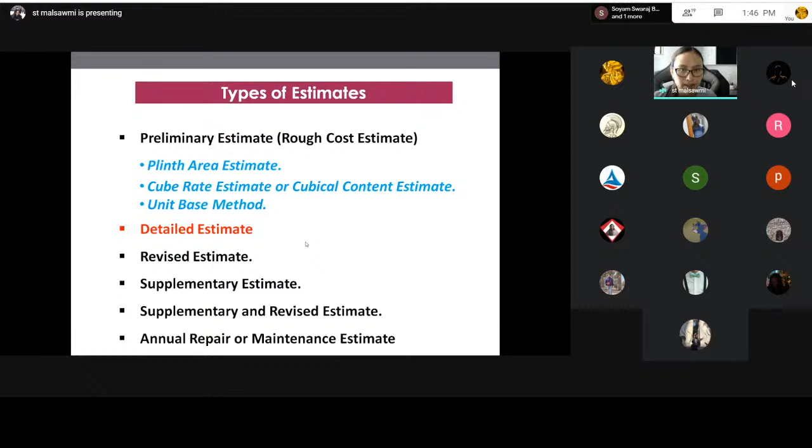All right, so today we will be looking into the detailed estimate, from the different types of estimates. In detailed estimate, you already know what a preliminary estimate is, and a detailed estimate is nothing but, as the name suggests, an accurate estimate. Usually detailed estimate can't be worked out at the beginning of starting your project - plinth area estimate, or preliminary estimates, are used for the estimates worked out at the beginning of your project, as well as at the end to know the approximate cost.

To prepare a detailed estimate, you have to finish all your work first - all your details, all your specifications, all your plans, sections, elevations, and specifications have to be prepared first. After that, you can work out your detailed estimate from that.

In this, to prepare a detailed estimate, you have to take out the length, breadth, and height. Most of it uses the units we have already studied before. There are different modes of measurements - we have per square meters and running meters, and we have cubic meters. Here we are going to take out the quantities of each of the different items.

Also, like I've told you before, we have to start from the bottom - not from the superstructure, but from the foundations. So we will come up from the foundations. We will start with the excavation, then the laying of the PCC and your foundations, then comes the columns, then the floors, then the brick walls. If we're having a first floor, the floor of the first floor, then the brickwork of the first floor. If we're having the second floor, then we'll come to the floor of the second floor, brickworks, and the roof of that, and so on. So it's step by step from the very beginning to the very end.

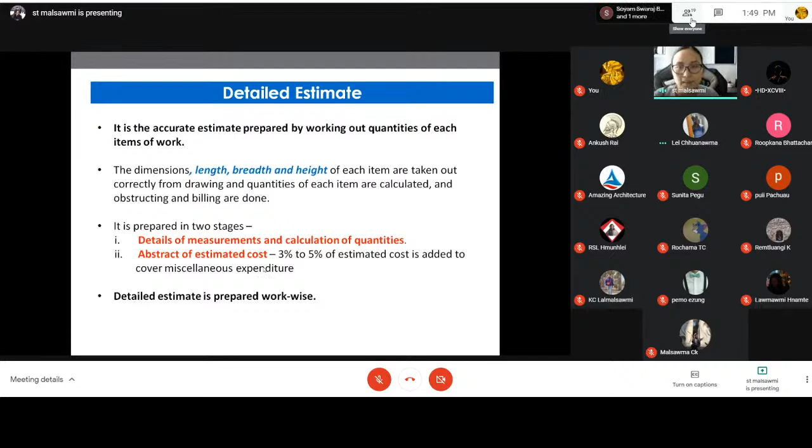It is also prepared for technical sanctions. So if you are working and you need a sanction, usually if you are working as a contractor, or if you are going to build a building, you are going to need a sanction. So to get that sanction, you need to submit your plans for tender calling, and also you need to submit your plans as well as your detailed estimate for sanctioning of the money for the project that you are going to handle.

In the rough estimates, the preliminary estimates, it's just a rough estimate, so there can be many mistakes and many different items or costs which are not calculated in the rough estimate. In the detailed estimate, all that will be eliminated, and this is going to be - you can't say it's the exact detailed estimate, but kind of exact - but you still need to give contingencies, like 5% contingencies for your estimates.

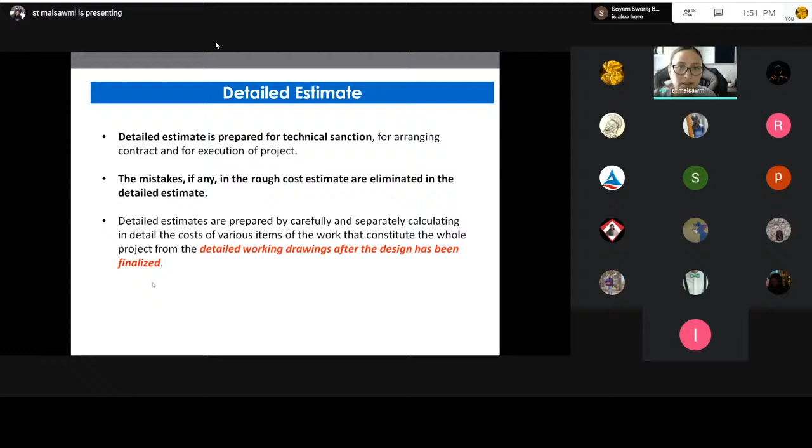So you need to have your detailed working drawings and your specifications first before you actually start your detailed estimate. First, like we've already talked about the two stages - the details of measurement and the calculation of quantities. Like I've already told you, the different works is divided into different heads, such as earthwork, concreting, brickwork, RCC, plastering. That comes under different heads.

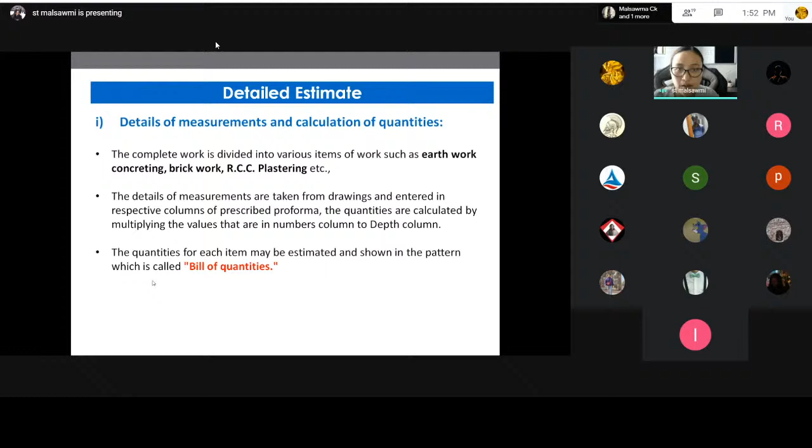It is also divided work-wise, and the details of measurements we will take out from the drawings, and we will learn how to take out the quantities from drawings in this class. It is also called the bill of quantities - I think you might have heard this, BOQ. When we're talking about BOQ, we are talking about the calculation of quantities.

Details of the measurement form, or the bill of quantities, will be somewhat like this: we will have the item number, the description of the item, the number of items, length, breadth, and height of that item, and then the quantity - length into breadth into height. We might also have the units after this column, and then the explanatory notes or remarks, which show how you calculated your length, breadth, and height.

You may write it here in the explanatory notes how you have taken out. And then we have the abstract of estimate cost. After we have worked out all the different things - length, breadth, and height - now in the abstract of estimate cost, we will only take out the final quantity that we work out here. We will take that out and multiply it with the rates so that we can know the rate for the specific items for each and every detailed item of work in your drawings.

Usually a percentage of 5% is given, added for contingencies due to unforeseen items or expenditure. Even though you are doing a detailed estimate, there will still be unforeseen items or expenditures, which may be due to loss because of some failure in your equipment, or unforeseen reasons like a landslide where you need to redo all your work again. All those will be put in the contingencies.

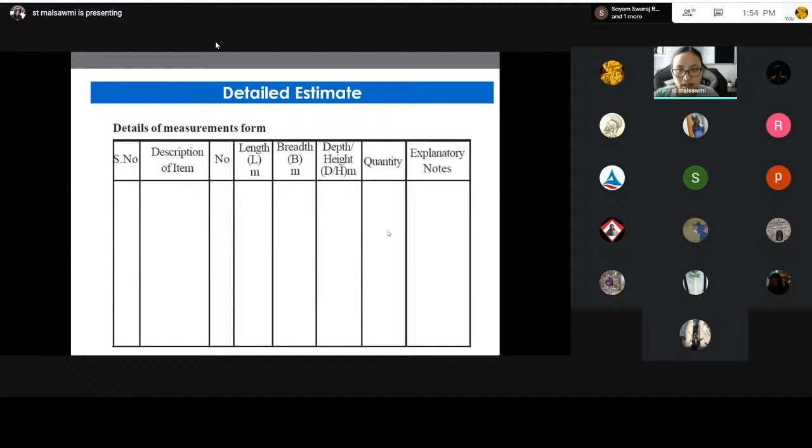After you have calculated the quantity of each item, you will take that total quantity of each item along with its unit - cubic meters - the rate as per the SOR PWD, the rate per unit, and then the total amount. After the total amount, everything will be calculated, and after adding all the amounts of the different particulars, we will get our final estimate cost. From that, we will add 5% contingency and maybe 2 to 3% establishment charges.

All right, do you understand it at least a little bit? Yes, yes, yes ma'am. All right.

So for a detailed estimate, including the detailed estimate that you have worked out, you also need to submit a report, specifications, the abstract of cost, and the price bill of quantities, BOQ. So when we're talking about the BOQ, that is the abstract of cost, the price bill. Usually, when you are calling for a tender, how this tendering and contract system works, you will learn more in detail in your next semester in professional practice one.

But now, basically what you do in a contract is, for a work to be sanctioned - let's take our department building for an example - you are designing the department building first, and it might be that the money is sanctioned by the central government or from the university. So first you need to work out the plans and give the specifications. After you have the working drawings and specifications, you will calculate the detailed estimate.

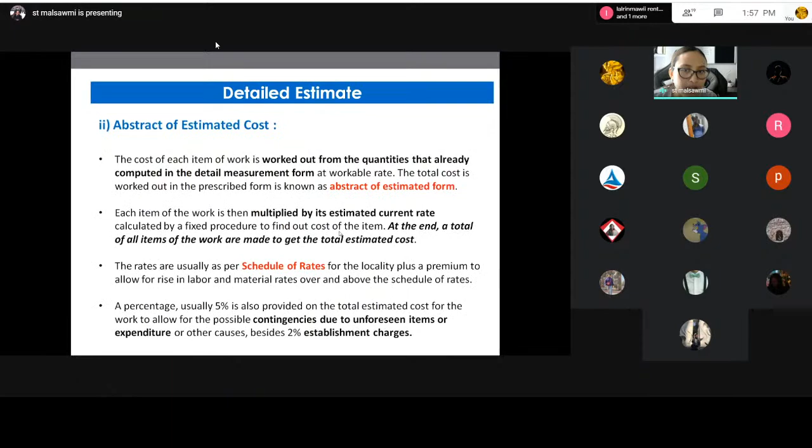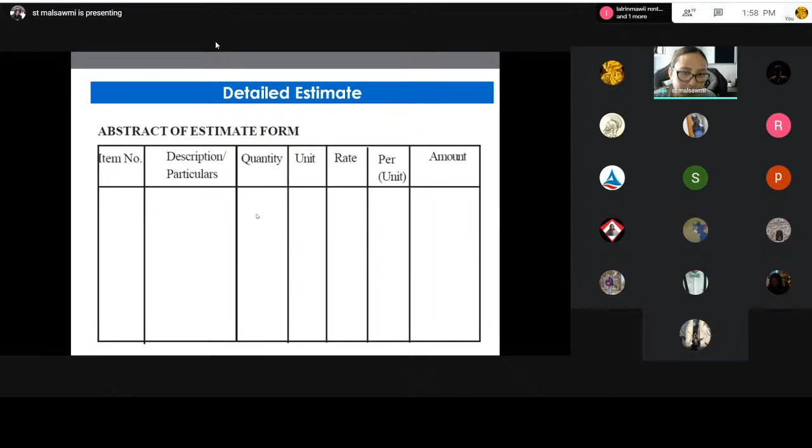So for calling out a tender, you will need to give out the plans, the working drawings, the specifications, and also the bill of quantities, BOQ, or the abstract of estimate form over here. You won't give the detailed calculations of the detailed estimate as you work out here - this is merely for the calculation of the final form. So you will give this out, and from this they will know the amount and quantity, and the rate they will answer for themselves.

So for the sanction of the money, you will need to send in the report as well, the specifications, the abstract of cost, and calculation sheets if needed.

Ma'am, in the report you mentioned explaining history. What does that history mean? Is this for the sanction or for giving out the DPR? Have you heard of DPR, detailed project report? In a detailed project report, this is when there is a...

So suppose, usually what we do here is, for something like a YMA hall or different halls in different localities, we will prepare a detailed project report for that. We will write about the history of the area, the history of the locality, why the locality is needing that particular project like a hall. We will write about the need for it, the history, the necessity, and what all things will be included, and you will also give your drawings and your estimate, and submit it to the funding agency.

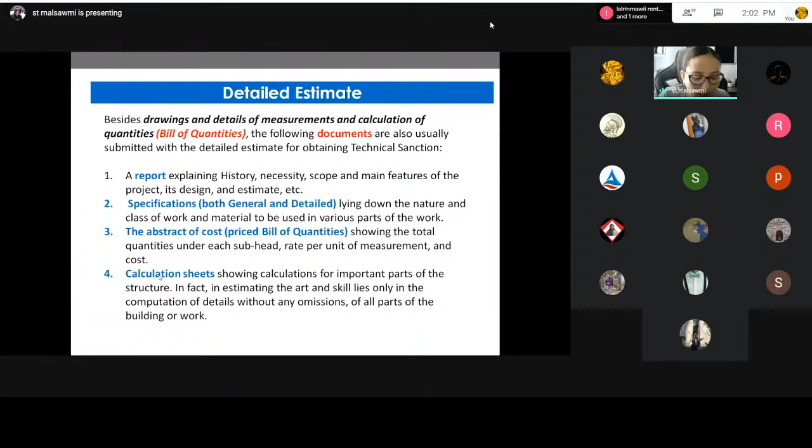Okay, you will understand it more once we start calculating, how the calculations are taken out. So you will learn that. Okay, miss, one question. Yes.

Miss, this type of estimating doesn't include the labor charges, right? Yes. So if a contractor wants to win that tender, and the estimation cost does not include the labor charge, how will he calculate those labor charges? How many laborers would be working and all? Yes, that would all be in the SOR.

Okay, you will understand it more. Yes, all those calculations, how many laborers per square meter or per square foot you need, and what is the labor charge of that, is all there in the SOR as well. Okay, everything you need is in the SOR. All right, miss. So now we will look into how to.

We still have one hour left. I have another class at 3 o'clock, I'm taking an extra class for them, so one hour is more than enough for this class.

Okay, we will be learning how to take out the quantities. The first thing you need to know is how to take out the quantities of each different item. We will take an example and start calculating, and I will give you an assignment on this as well, from the textbook. There are different ways.

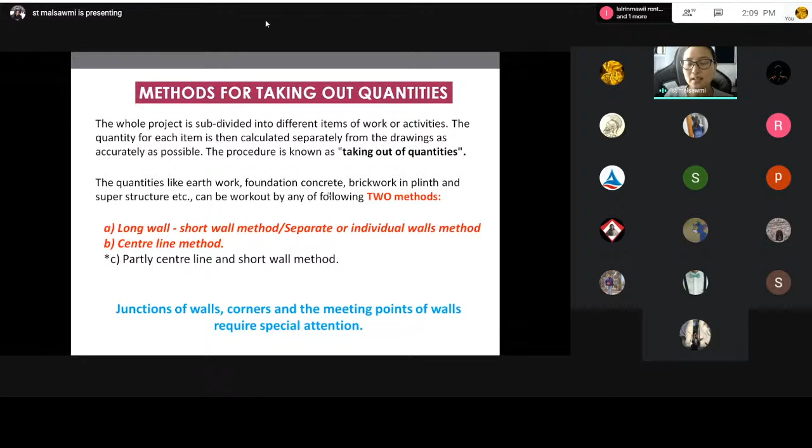So when you are taking out your measurements for your walls, the junctions and meeting points of your internal walls to your external walls are the most important points when taking out quantities.

So the first method, the long wall, short wall method: imagine a room with 4 walls, a square room, or it might be a rectangle. So one wall will be called the long wall, and the other wall perpendicular to that will be the short wall.

To take out the quantities, we calculate the long wall, and there will be 2 long walls, similarly 2 long walls, and 2 short walls. That is how we take out the quantities. This is very simple for just a 4-room building, very easy to calculate.

But not so much in a complicated room—when I say complicated, that means when you have lots of junctions and also lots of partitions with different wall thickness. And that is about the long wall, short wall method.

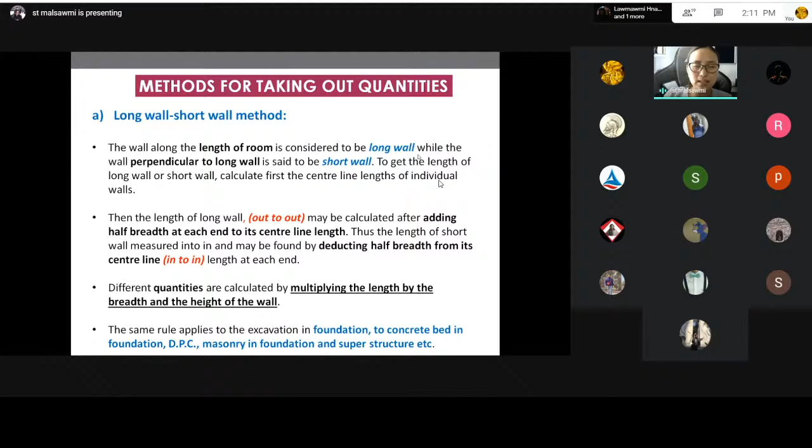So different quantities are taken out by, you will take your long wall and short wall, you will calculate the length of that wall. It's like taking out the circumference of that, and then multiplying it to get the area. You have to multiply it by the height and the breadth as well. So to take out the length, we are talking about the length when we are talking about short wall and long wall method, or the center line method, to take out the length, how you will calculate the length of all your rooms, of all your walls.

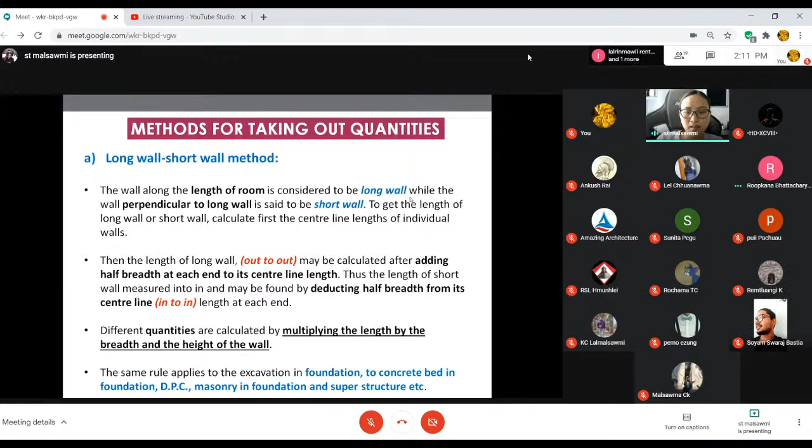So long wall, we have to take the center to center length of that particular wall, and also we will need to take the half breadth on one side, half breadth on the other side. 2 half breadths is equal to 1 breadth. So center to center plus 1 breadth is the long wall, and short wall is center to center minus 1 breadth, because we've already added 1 breadth to the long wall, right?

Confusing? You don't quite understand it yet, right? You will understand it. Yes, just know this. Now it's a little bit, yes, same, it will be a little bit confusing because you don't know, you don't have any idea what I'm talking about right now, about the walls.

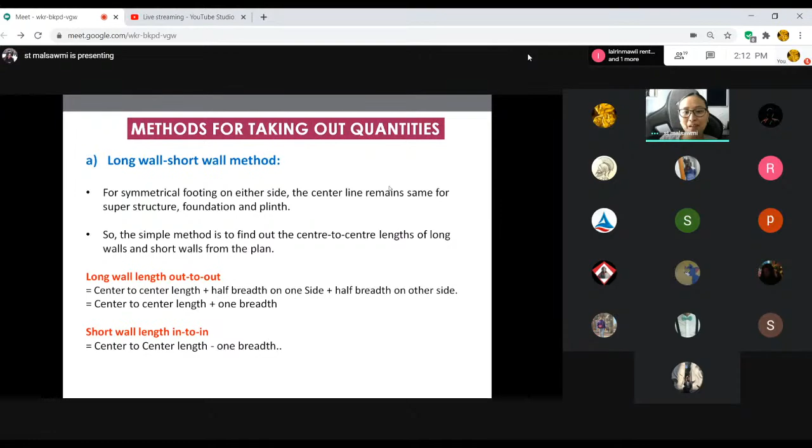I'm just talking about the theory, okay? We will go to the calculations. You will understand it easily.

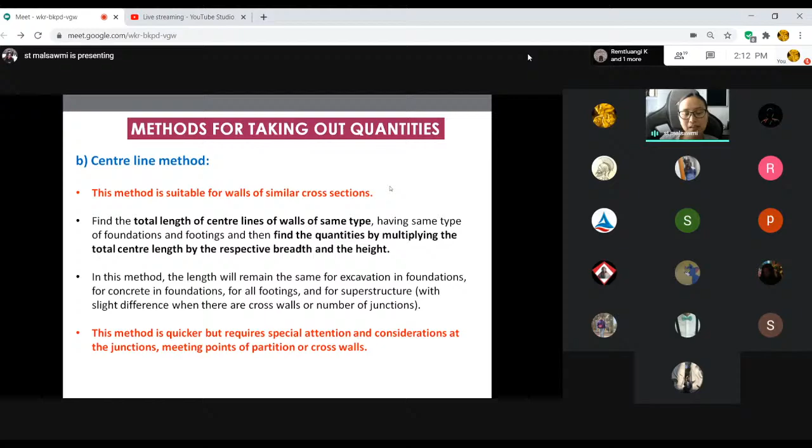So center line method, you will calculate it from the center line, and this is quicker, but like I've already told you, at the junctions is where it gets tricky, and also where calculations or attention is required most at the junctions. All right, okay, so this is for your exam.

So for buildings having different types of walls, each set of walls shall have to be dealt separately. That means if different type of walls means different thickness of walls, okay? So you can't take different thickness of walls into the length of the different thickness of walls into one for your calculations of your area.

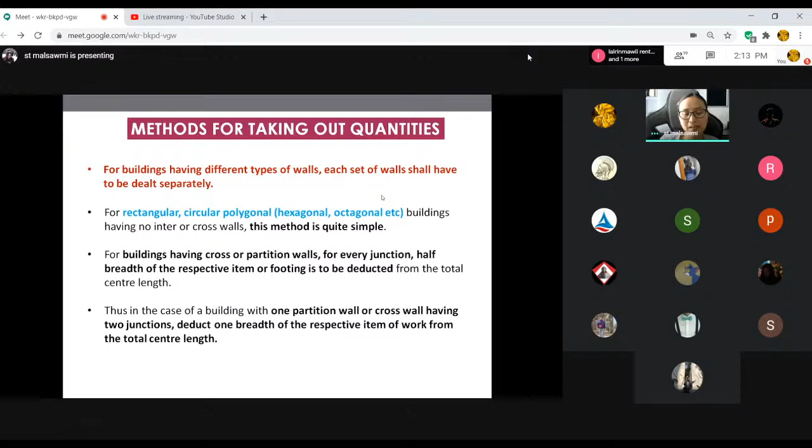So for rectangular, circular, hexagonal, all those, the method is simple. So deduction and all this, we will go to the practical, and then you will all understand it.

Partly center line, partly cross wall methods. This is the combination of both the methods. Center line method is applied to the external walls, and long wall, short wall method is applied in the internal walls in this partly center line, partly cross wall method. Remember this: center line method applied to the outer walls, long wall short wall method applied to the internal walls.

This is in the cases where you have different thickness, or also you have different partitions in your rooms, and for different thickness and different levels of foundations. So because of this reason, all engineering departments are practicing this method.

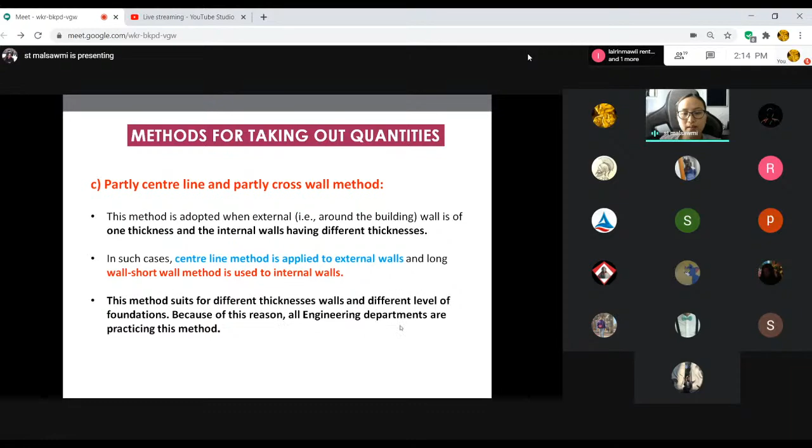So here we don't have 4 foundations. Understand? This is like the load bearing wall, where you dug your foundation all throughout the whole walls. In the methods that we are going to study for an example for now, you don't have 4 foundations here, you have 1 foundation which runs throughout the whole building. Understand? This is how they usually do in the mainland.

Do you know what ma'am I'm talking about? Like usually here we will have columns. We don't have any columns here, right? It's a load bearing wall, so no particular columns, no individual columns. We will have 1 foundation which runs through all of this.

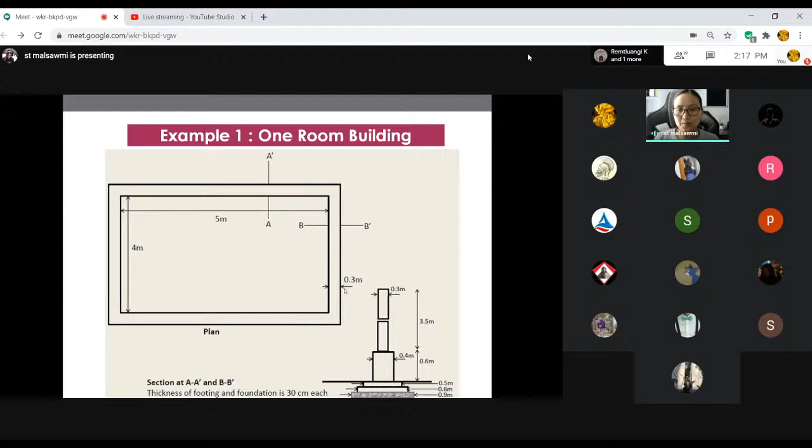So thickness of footing and foundation is 30 centimeters each. This thickness is 30 centimeters, here the thickness is 0.6 meter. The thickness is the height, the breadth, understand, 0.9 is the breadth. So here 0.3. That means that, oh, I need something.

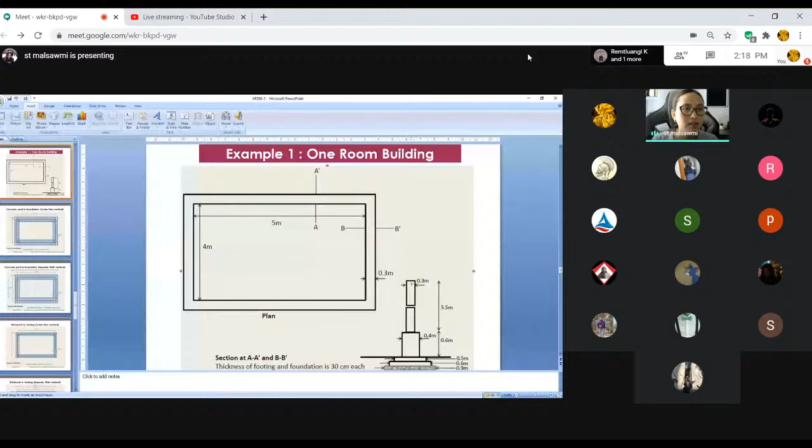You can still see my screen, right? So in order for us to calculate the lowest one, I need shapes. So the lowest one, we're seeing the plan of this 0.3 thickness, right?

So in order for us to calculate this, the lowest one, let's say we have a center line here. You can see this, right? The one I'm just doing, the shape.

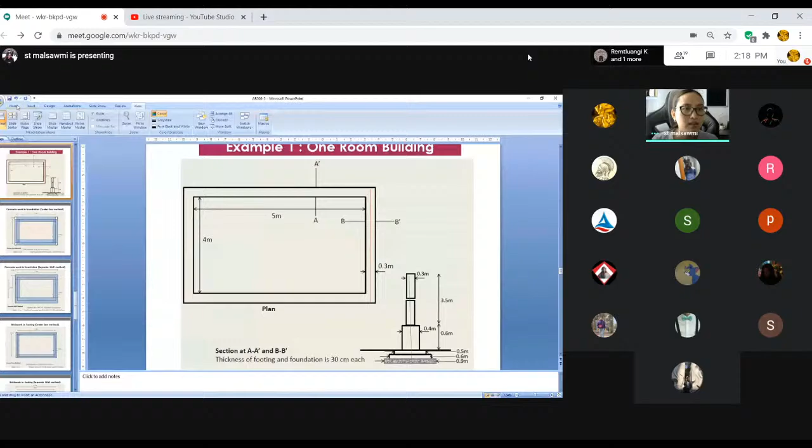We have a center line here. Suppose, and this center line is in the shapes. I want it to be red. You can still see it, right?

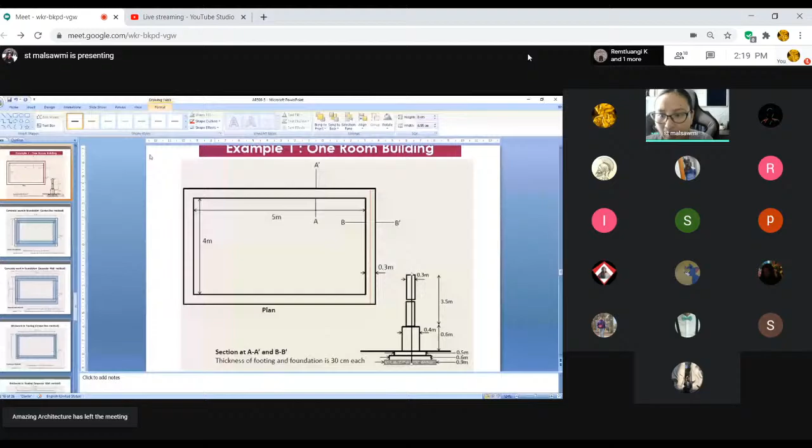We are taking the center line here. Just imagine this is the center line. I can't keep it in the center. Okay, and then, how do you make it red?

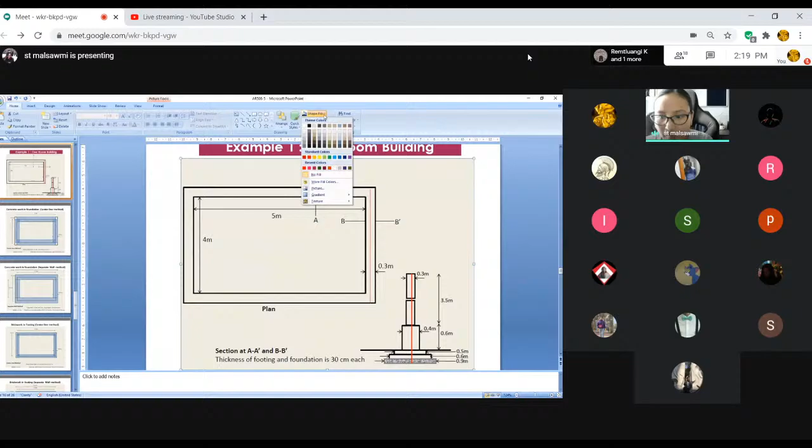Shape fill is here. Is that it? Whatever, so we're taking this as the center line here, center line.

So we are only seeing this part, the brickwork at the top for the plan, right? We don't see what's underneath. The lowest part is the footing, so the lowest footing is 0.9 meters. That means that from the center line, it's divided by 0.45, 0.45, understand, right?

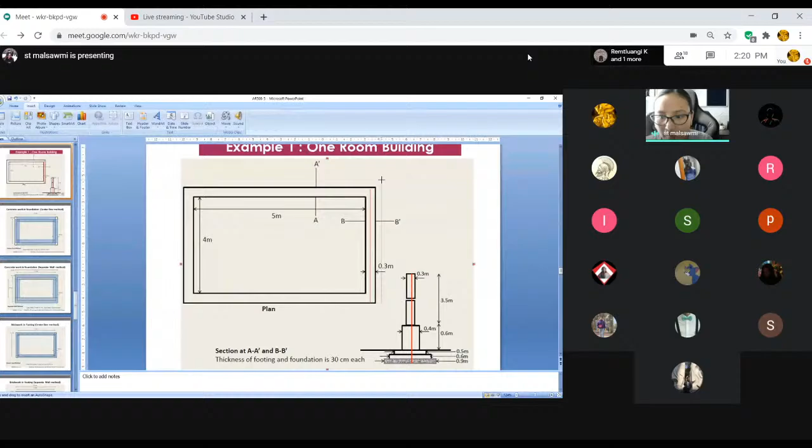So the lowest one will come something like this. Something like this. Miss, you're drawing the foundations. You're drawing the foundation wall.

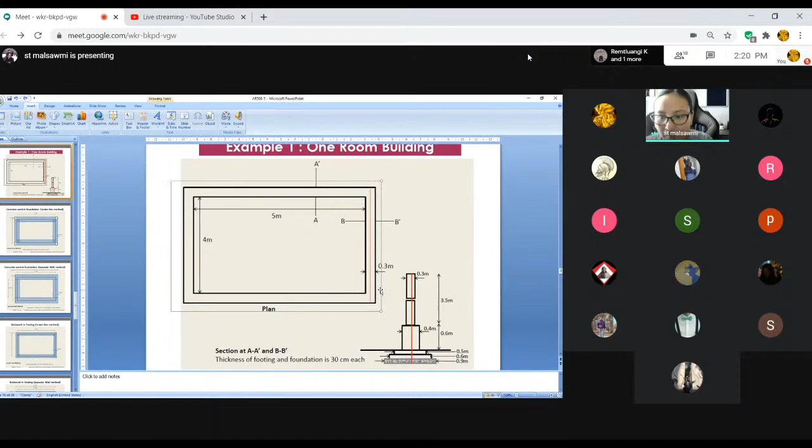I'm just trying to show you how the foundation is, how you are going to see the foundation, right? And also something like that, because it will be bigger than this in the foundation, because from here you are seeing only the walls, right? And we are going to see the foundations. So, okay, this is enough for now.

Coming to the next one, this is how the foundation is showing, right? So here, if we calculated the center line of this, what will be the length of the center line here? How much is it going to be? It's 5 meters, the internal wall is 5 meters, right?

Length, yes miss. And then what will be the center line of this? That will be, if the thickness is 0.3 meters, the center line overall will be 5.3 meters. Will it be 5.6, miss? No, 5.3, it should be half of this and half of this, right? So that means it's 5.3, so first we have to know the center line.

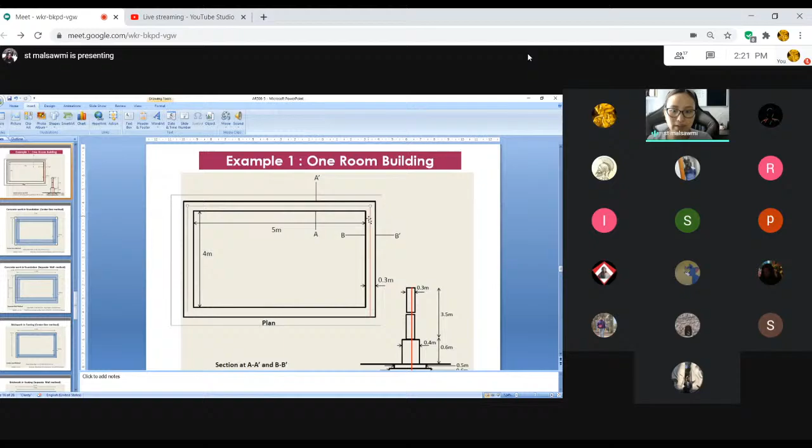So the center line is 5.3 for this part, and the center line of this will be how much? 4.3 as well, right? Half of this wall thickness, half of this wall thickness, added with this, will be 4.3, right?

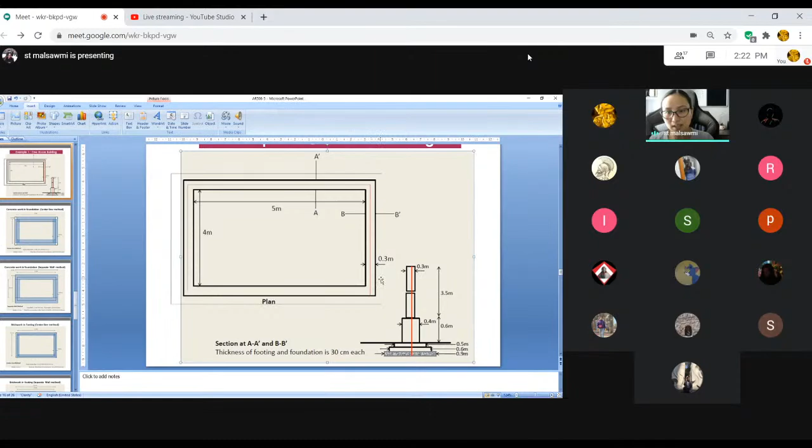That you understand. So going to the next one, we have 0.9 meter breadth. So it's only 3, so if we take it from the center line, that means we will have from here 0.45, 0.45, right? If you offset it, that will be this one, right? Understand? Now we're taking a drawing of this concrete work in foundation.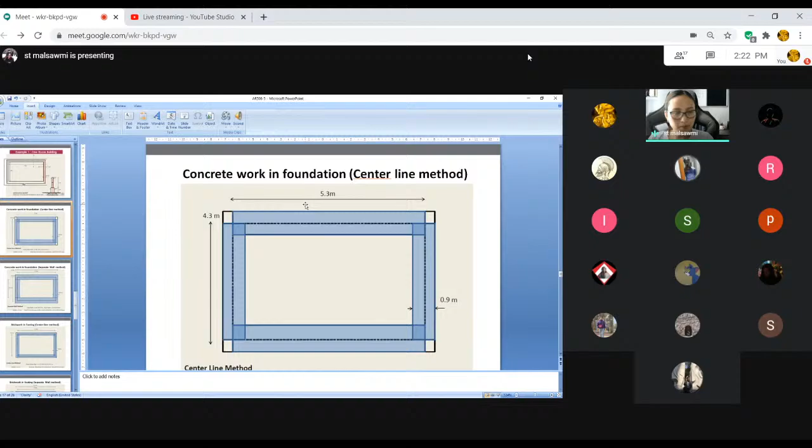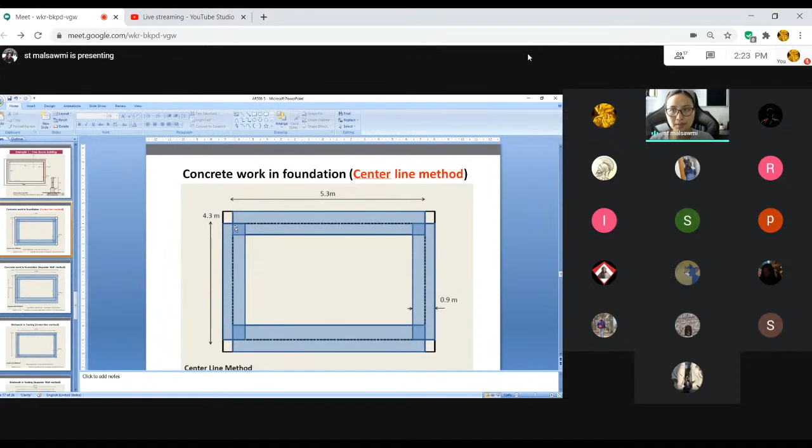So before I show you this, let's look at this. To calculate this, we are going to use the center line method first. We will calculate it both with center line and long wall, short wall method. In center line method, we take the center line of this, center line of this, center line of this, understand? We take that, and we add all of these center lines for the length, and then multiply it into breadth.

Let me stop presenting and then I will present my whole screen, all right? Is it visible now? Is my screen visible? Yes ma'am, yes.

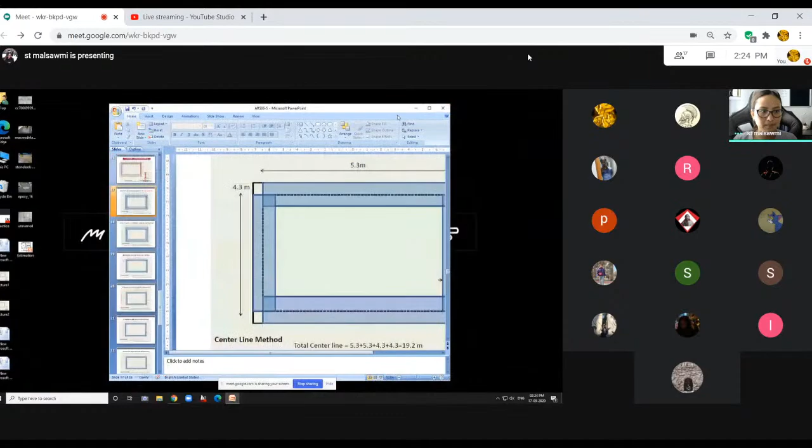Okay so here I have prepared... why can't I put these two side by side? Why can't these two come side by side? Just open it, I am opening it. What to do, now I am confused. I am dragging it but it's stuck in one place.

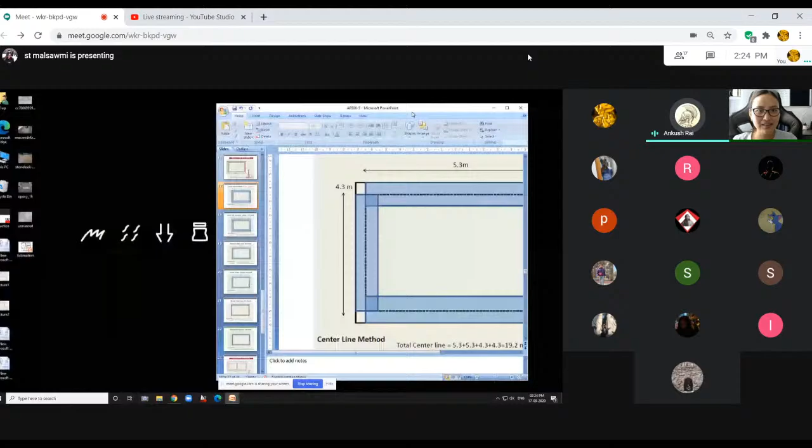Open Chrome for a moment, then open the second one. Open the Chrome tab once and then open the second PowerPoint tab. Maybe that would work. Oh, should I close this?

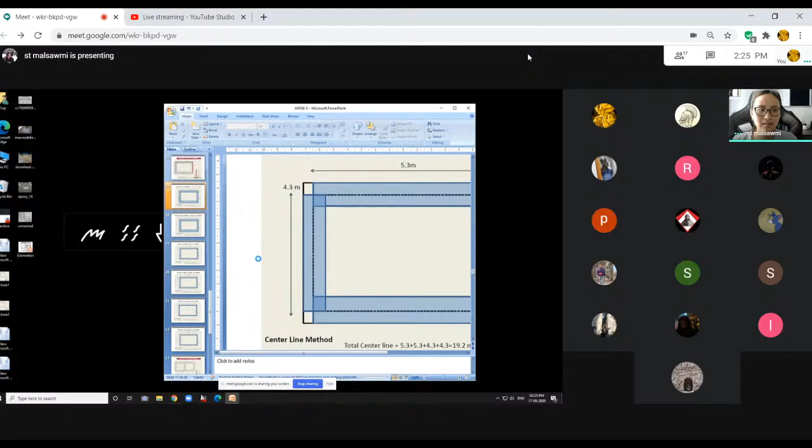Yes. I have this, right? Yes. Now open it again. Wait, I have to put it here. Professional estimating and costing. Here, so it's coming in the same window.

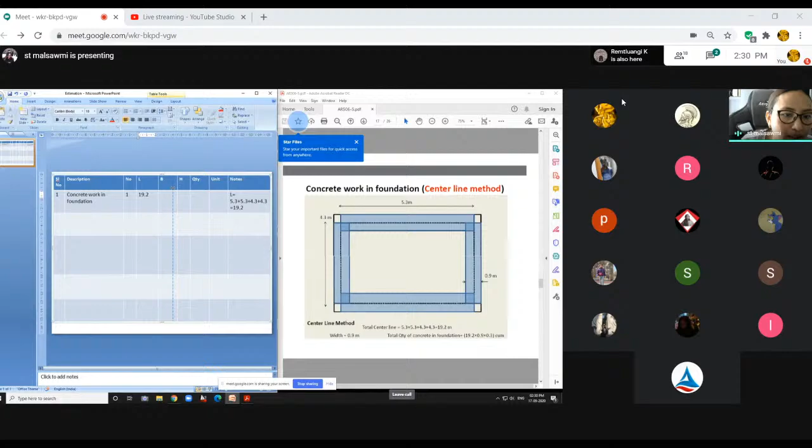Below the rule, okay, so length will be 19.2, right? We are taking the center line. 19.2. Okay this is a little bit... okay, 19.2 will be the length.

What is the breadth? What is the breadth here, the breadth is how much? Miss, 4.3. No, we have the breadth here easily: 0.9, it's given here, the breadth of foundation. It's the foundation, we're talking about the foundation, right? Yes, the breadth is for how much? 0.9, right, 0.9, and then what's the height?

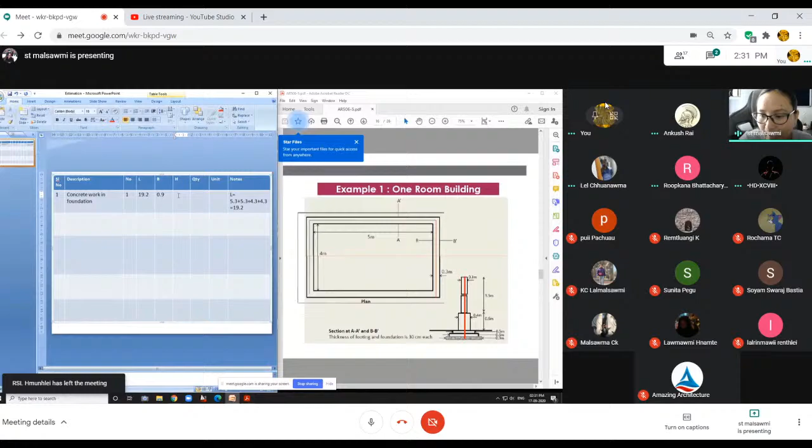The height is here, thickness of footing. No, thickness of footing and foundation is 30 centimeter, 30 centimeter, right? So height is 0.3. So what's the quantity now? 19.2 into 0.9 into 0.3, how much is that?

19.2, do you have a calculator? Yes miss, 5.184.

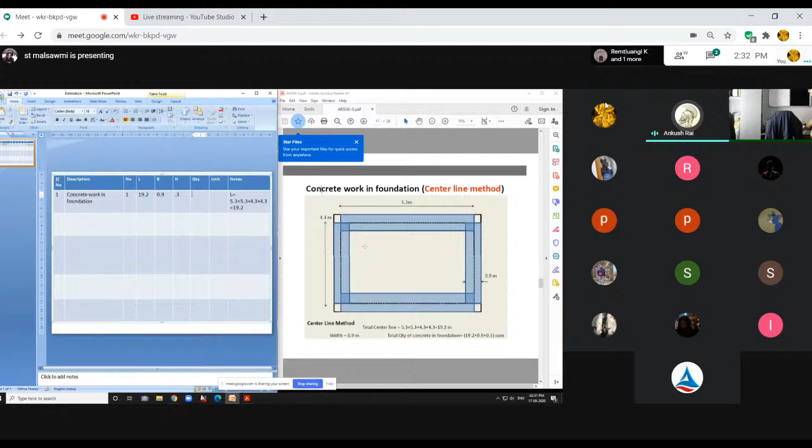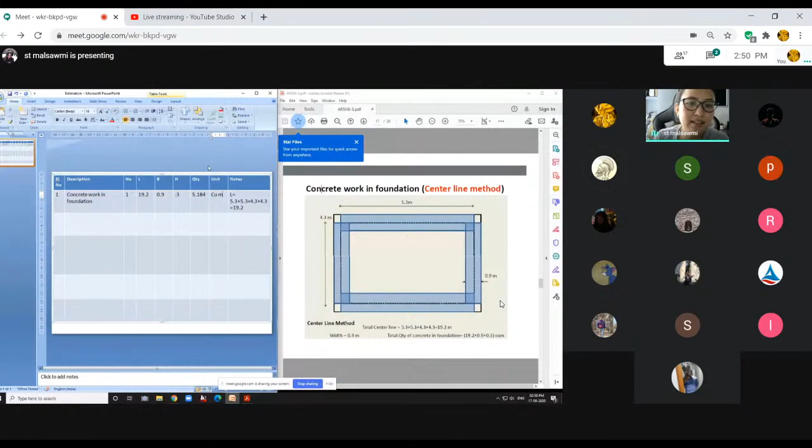Yes, miss, 5 cubic meters because it's in area, right? Meter into meter into meter is equal to cubic meter, right? Square meters. Yes, yes, yes. All right, you have to know all this. So this is the length, okay? Before going out into the next, all of this, we'll try to calculate it from here, all right?

So let's see, the next one is number 2. Only this one is the concrete. The base is the concrete, next is the brickwork, all right? Brickwork in footing. All right. So we will calculate the next one.

Okay, like I've already told you, we have to calculate it from the base. So first we have calculated this. Second one, center line number 1. Right, length will be the same one. Center. Right, 5.3 plus 5.3, it's the center line, right? The center line will be similar for all this, right? So length will be 19.2, and then the breadth is how much?

What's the breadth? 4.5. 4.6. 0.6. Someone is saying 4.5, someone is saying 0.6. Yes, it's 0.6. It's the next one. It's 0.6 here, right? And then what's the height?

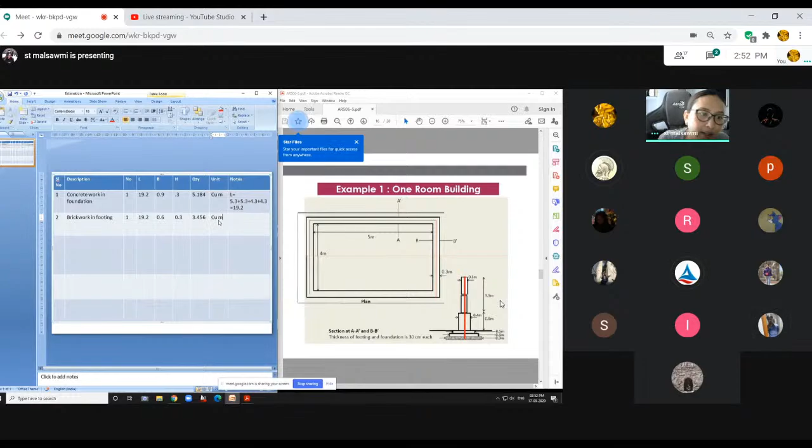CUM, right, correct. The third one, brickwork in footing number 2, right? We can't take this two similarly, right? Because the breadth is not the same. So number 1, length will be 19.2 again, right? Breadth will be 0.5.

0.5, 0.3, what's this? What's the quantity? 19.2 into 0.5 into 0.3. 2.88. All right, and then cubic meter again.

Number 4. What's the fourth one? It's the plinth, right? The fourth one is the plinth.

Brickwork in plinth.

Center line, same again, right? The length, because we're just taking the center line. 19.2, why is this red? Whatever. What is the breadth? Means 0.4. 0.4, right? 0.6. So isn't it supposed to be 0.4? 0.4, 0.4, 0.6. Okay, breadth.

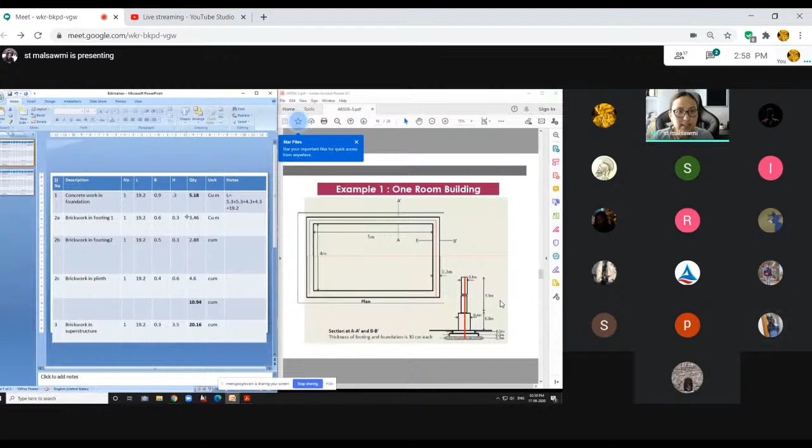Is this clear? Yes, miss. You know how to calculate that, right? So this is for calculating in center to center, all right?

So now let's do the separate wall method. All right, we will take it as long wall, short wall. So first one is concrete work in foundation again. So long wall, short wall method. So we have 5.3 now. So long wall, short wall method is how we usually do that.

Like I've already told you, one center line plus one breadth, right? So length is equal to here, L is equal to, so what is the long wall? The center line, 5.3 is the center line, right? Okay, we won't do it there, we'll do it from here again. So now we already know what the center line is, right?

The center line is 5.3, right? For here, and we'll take this as the long wall, one side as the long wall, all right? 5.3 plus, what's the one breadth? We were going to take one breadth. One breadth is equal to 0.9, right?

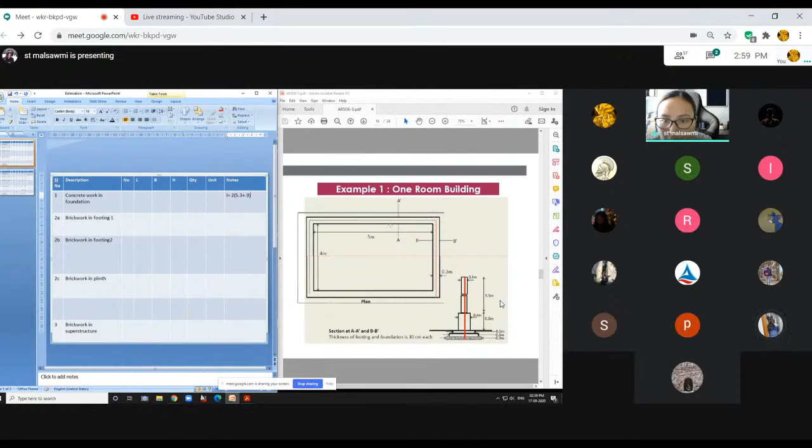Oh okay, clear? Is it clear? So it will be 2 into, because we have two long walls, right? We have one long wall here and another long wall here. Understand? Yes, miss, separate wall method. See, one long wall here, one long wall. So see, if you see, we'll take this as the short wall, this as the short wall, this overall as the long wall.

Understand? So we have this plus 2 into, there are two short walls, right? 2 into, so short wall we will take it as center line minus one breadth, all right? Center line of this is how much? 4.3, right? 4.3, is it clear? Do you understand?

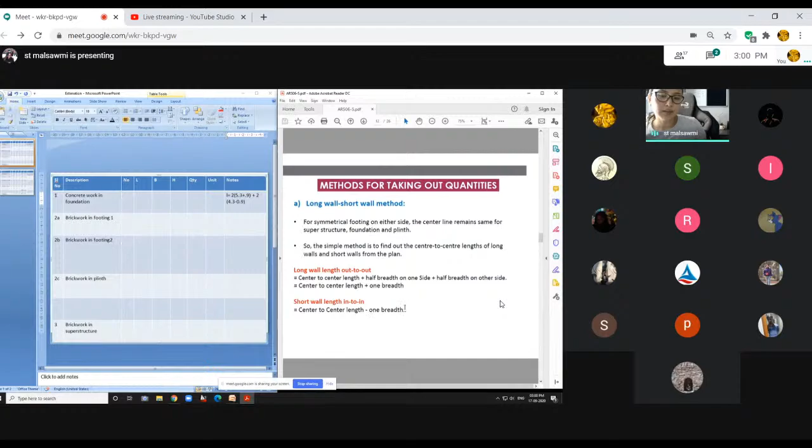4.3 minus 0.9. Not clear. Not clear, yes miss. Wait, how will I make it clear? Why minus? Huh? Why minus, see over here, let's go back to this. Long wall, center to center length, plus half breadth on one side, plus half breadth on the other side. That is center to center length plus half is equal to one breadth. I thought center to center, long wall is easier. That means that we need to have, see, we are taking only the center line now. Don't look at this 6.2 over here, this is already worked out, all right? So here we only know what the length of the center line is, right?

We know the length of the center line is 5.3. In order for us to take this long wall, understand this much is the long wall, right? We have to add half of this here and half of this here. That means 0.45 plus 0.45, which is equal to, we are going to try to find out the length of this. Is it clear?

Yes sir. So that is why we are adding 5.3, the center line, plus 0.9. Understand, half of this and half of this is equal to 1 breadth. The breadth is 0.9, right?

Right, 0.9. So in the short wall, the reason why I did 2 into is we have 2 long walls, this long wall and this long wall here. Now we are going to take the short wall. The short wall is over here. Since we've already taken that part over here, we need to minus 1 breadth. Minus 1 breadth, is it clear?

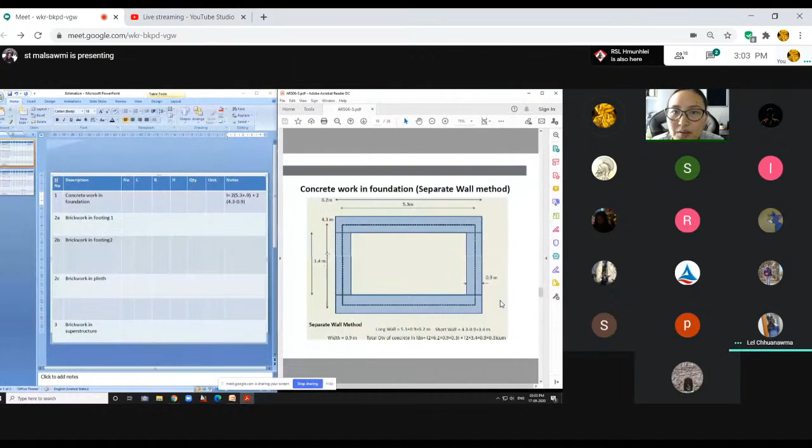Yes ma'am. So now, concrete work in foundation is equal to - so from here, this is just what I've taken out for you to make it easier, understand? So now we have to see it from here. So number 1, concrete 1, length is equal to - how much is it?

2 into, how much is it? 5.3 plus 0.9 is equal to 5.3 plus 0.9, 6.2, which is equal to - let's see for here, 2 into 5.3 plus 0.9, it's 6.2, right?

6.2 plus 2 into 6.2 plus 2 into 4.3 minus 0.9 is 3.4. Do you still have confusion how I am taking the length and breadth?

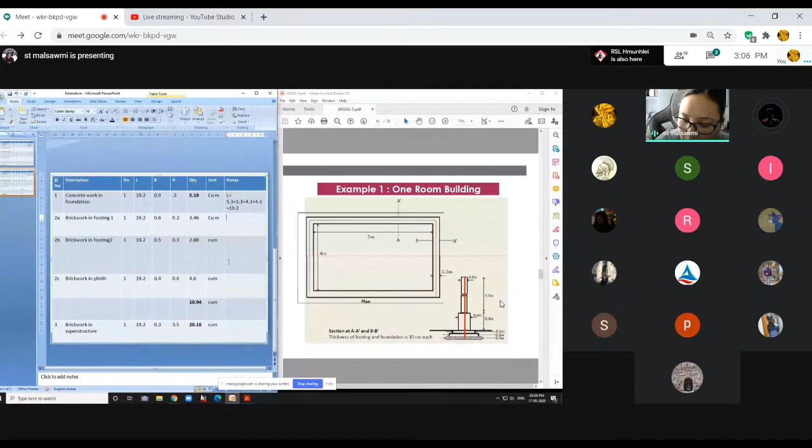L is equal to - let's do it here. L is equal to center line, 2 into 5.3, putting one plus is 5.3 plus 0.6, right? 5.3 plus 0.6 plus

2 into 4.3 minus 0.6. 4.3 minus 0.6, right? Do you understand? Yes miss.

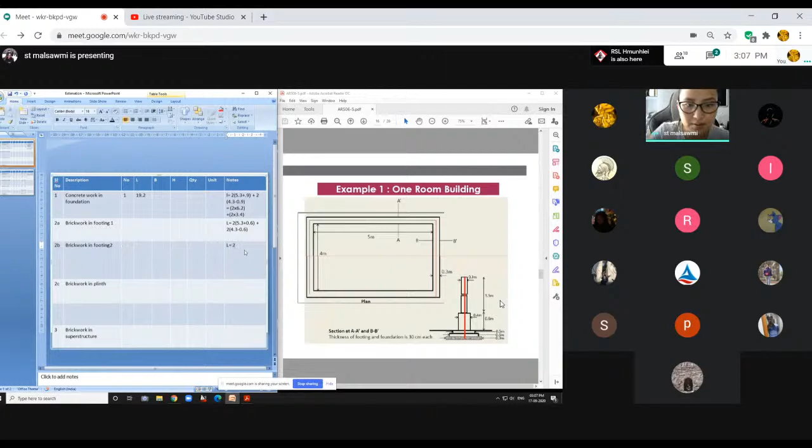Pass. And here also, L is equal to next one, 2 into 5.3 plus 0.5 plus 0.5, plus 2 into

4.3, to 0.5 - not into, plus, it's no, plus. Minus. Minus, 0.5. So if you calculate that, that will all come to

19.2. How much will it come to? 19.2, it will all be 19.2. Is it 19.2 again? Yes.

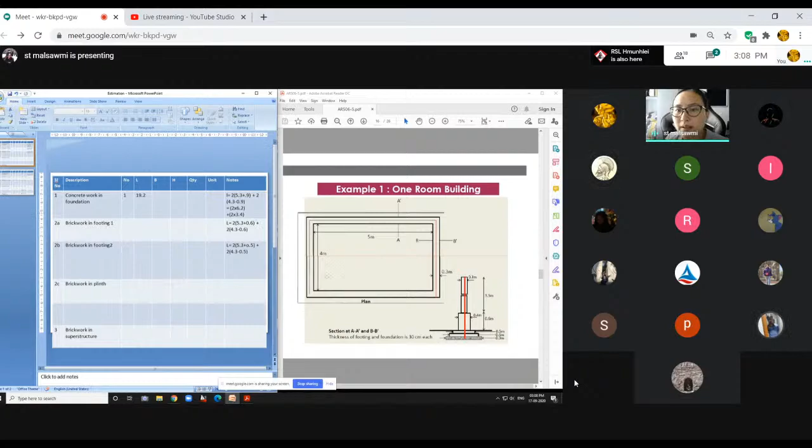So it's the same thing, but how you've taken out the length is different, right? So now do you understand what is center line method and long wall, short wall method? Yes, clear miss, now right? Are you absolutely clear? Yes miss. So see here, separate wall method.

The next one will be somewhat like this. So the total length, we will have it like this. So this is the one we just calculated here, right? 5.3 plus 0.6 is equal to 5.9, the total wall, right? 2 into the total wall minus, plus 2 into the total wall of the short wall. 4.3 minus 0.6 is this much. Understand? So likewise, 5.3 plus the breadth of that is the total length of this.

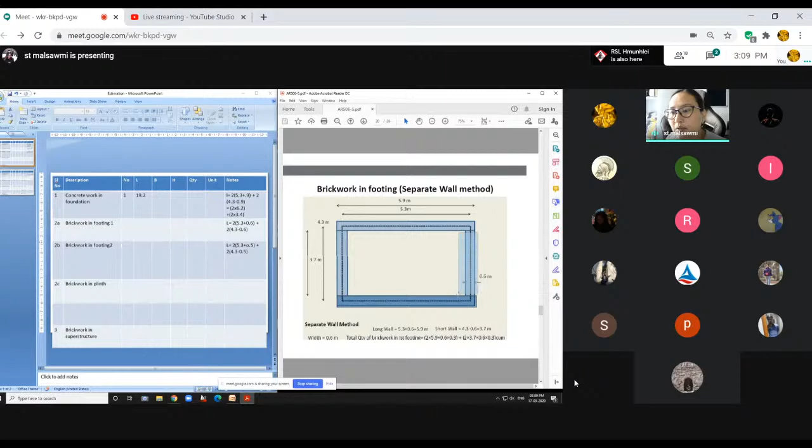Understand? So this means we divided into this is the long wall, 2 long walls, and then 2 short walls, this one and this one. Understand? Clear now, right?

Okay, so now we have this example to take on again. Let's delete all this. So that is very easy for...

One room, just one spare room. But here it's a little bit complicated because when we are taking a center line here, we have a junction here, right? We have this one junction here. Here it's just one, so we know how to add and subtract that, but here we have to see how it is going to be added and subtracted.

So now we are going to calculate this concrete work in foundation footings. Length, this note should be a little bit bigger. Let's make this bigger. So length is equal to, let's take a center line method. So first of all, what is going to be the length, the center line of this? So this is 0.3.

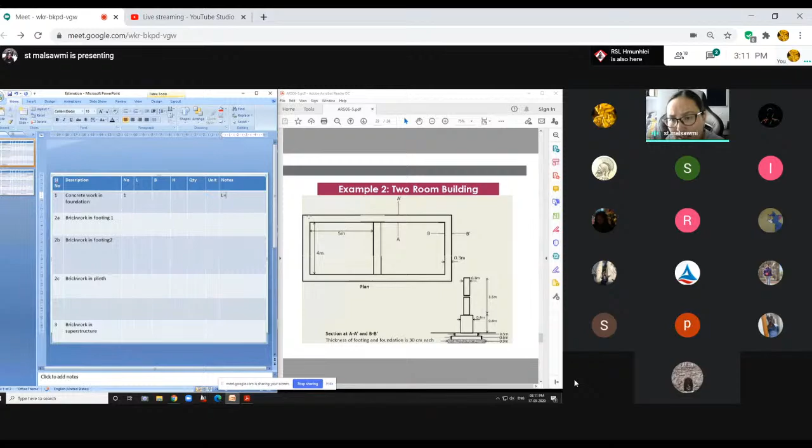Let's go into this one, the same one here, center line method. So now we have 5.3, 5.3, and 4.3 here. 4.3 here. And for the foundation, the thickness is 0.9 again over here, right?

So here, if we take the total center line, 5.3 plus 5.3, and then another one, 5.3 plus 5.3, plus 4.3 plus 4.3. The difference we have already taken here, but here, see, there is a place where this intersects, understand? So in this place where there is this junction, we will have to minus 2 of this into the length, breadth, and height. Is it clear?

Not so much, is it? So here the total quantity will be the total center length of all this. Understand? Total center length of all this, minus 2 into half of the breadth. Okay, this you have to keep in mind. 2 into half of the breadth into the breadth and the depth.

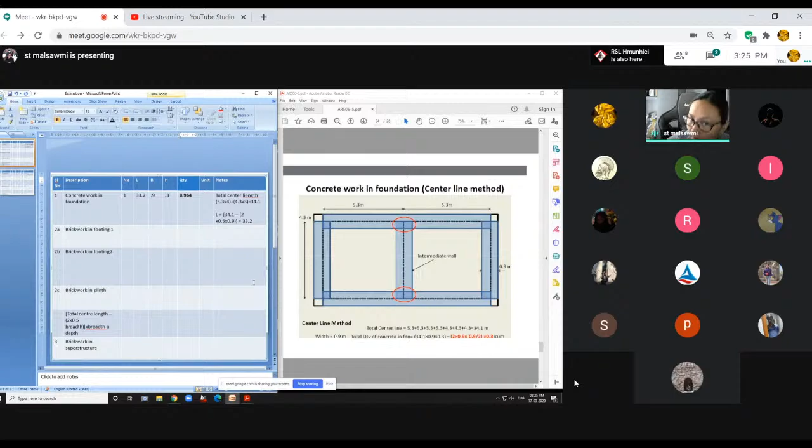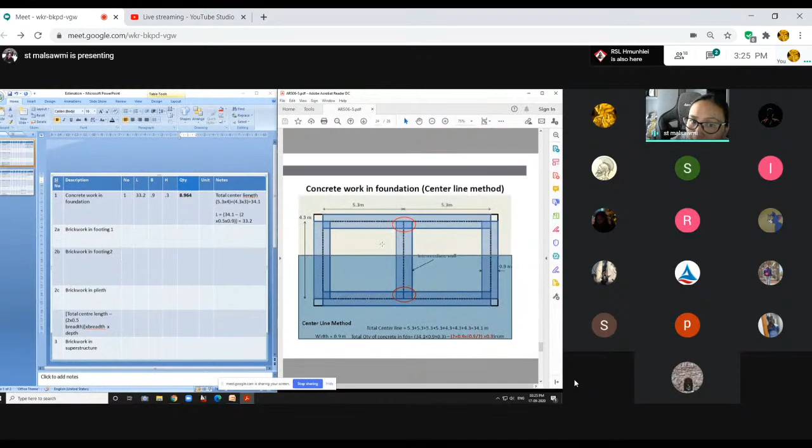So you know how to take the total center length, right? So we have an intermediate wall in between, and we have to account for the intersection, the two intersections here. So we have to minus from the center line the two intersections here, that is 2 into half of the breadth into height. Understand? 2 into half of the breadth into height. So we have to minus it because this intersection, like I've already told you, it's coming 2 times. That's the reason why, so 1 into 2.

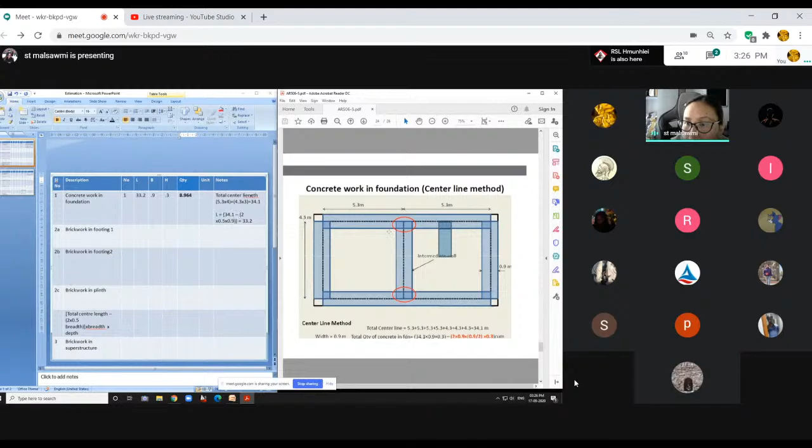Suppose, let's say we have one intermediate wall here, one more wall here. Then if we have one more wall here, that means it won't be 2 anymore, this will be length is equal to total center length minus 4 into... one more and one more will be here. So that will be 2 length minus 4 into 0.5 into 0.9. Is that clear?

A little bit clear? Yes, ma'am. That's the concrete work in foundation by center line method.

Let's do the separate wall method. This might be easier for you.

Separate wall method. What's the total center length? L is equal to... no, not that. We're talking about what?

5.3 plus 5.3, the center line, right? Length is equal to how much do you usually say? Long wall is 5.3 into 2 plus, let's say 5.3, all right?

Into 2. 5.3 plus 5.3 is how much, plus what? We still have to add one breadth, right? 0.9. Yes, 0.9, the base, the concrete one.

Let's do the next one, the footing, brickwork in footing. 0.6. That is the long wall, right? So long wall will be 2, right? 2 into, there's 2 long wall.

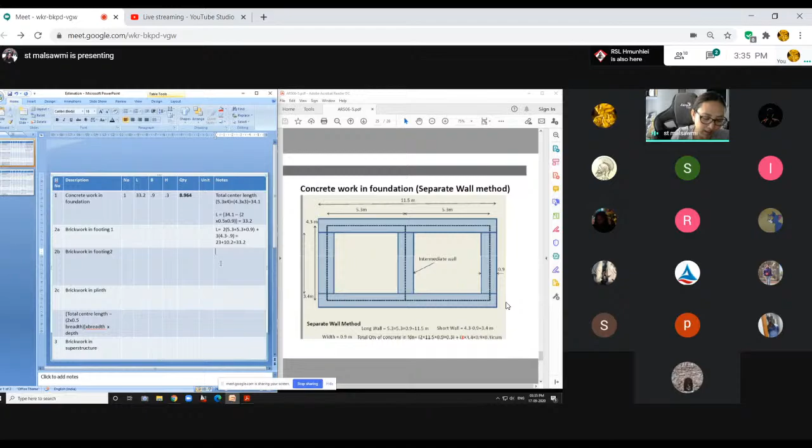Is it clear? Do you understand it now? Yes miss, yes miss, okay. For that center line method, I will just try to explain it again. Understand, because here the total center length is multiplied by the junction in this portion.

Let's call this A, let's call this B. In this junction A, it comes twice. That's how I want to, that's how I know best. It comes twice. Here also it comes twice, but we are making up for the part that we are not calculating on this part, as here as well, we are not calculating this part, right?

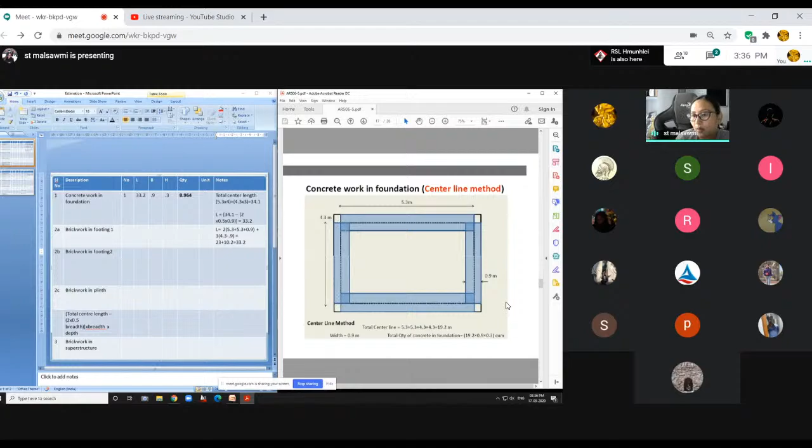This comes twice, but we are not subtracting this part because we are not calculating this part. So this part and this part are more or less the same, right? It's the center line. So it's the same.

But if we have a junction in the middle, understand, that means it is going to come twice like this, because this part we've already calculated. Now this part we are calculating it twice. So that means we have to minus this.

To minus this, it's half of the breadth, half of this breadth, into the breadth and the depth. So that means 2 into half of the breadth into the total breadth and the depth. If you look at it more clearly, I think you can understand it. You've all passed your class 12 mathematics, right?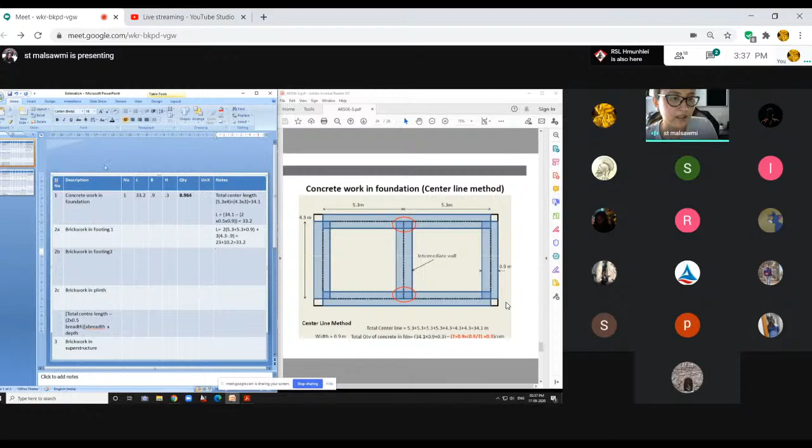So your assignment for today is to make a table like this and calculate the brickwork in foundation and plinth. This has 2 parts: brickwork in footing 1, brickwork in footing 2, and then the brickwork in plinth, and then the brickwork in your wall as well.

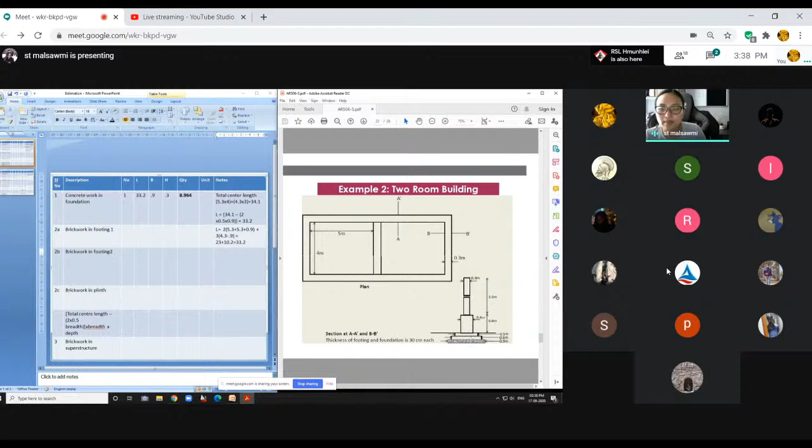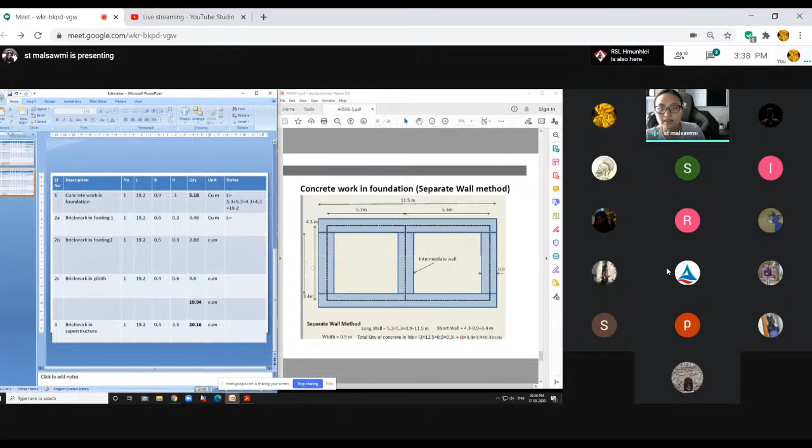Understand? So try to calculate that. You can try it using the center line method or the long wall, short wall method. Try to work that out as we did previously before. This is the same one. We've already calculated the foundation, the concrete work in foundation. You have to calculate the rest as we did before. That is your assignment.

Miss, one feedback - while highlighting certain areas, could you please increase the cursor width? Come again, the size of your cursor? Yes, I don't know how to highlight that in Google Meet. It was easy in... No, Miss, generally in your PC, in the settings section on the control panel - you could increase the size of the cursor. Okay, next time. All right, thank you, Miss. Thank you. All right, and now I think will you be able to do this?